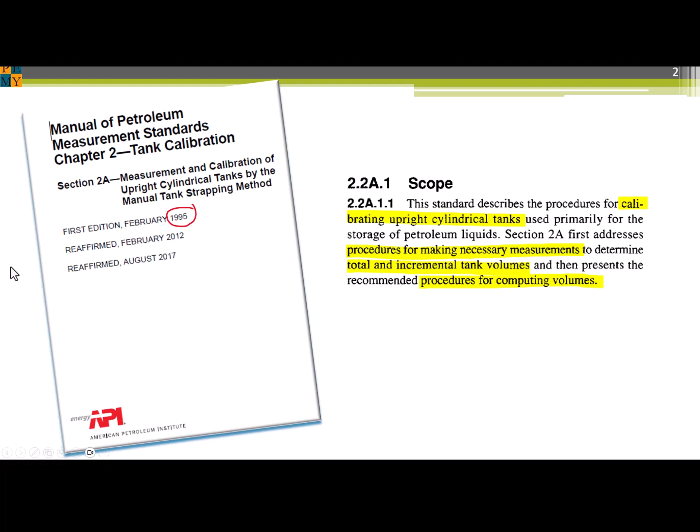The topic of today is about manual calibration of vertical cylindrical tanks. Note that this standard is nearly 30 years old without any changes. That's of concern, as you'll see. One of the important tools used in constructing the Egyptian pyramids thousands of years ago was the royal cubit, an ancient tape measure used by ancient engineers in the days of yore. The Egyptian pyramids are accurate to within 4 minutes of arc, or 1/15 of 1 degree when aligned along the cardinal points, north, south, east, and west. So I ask you, did standards help?

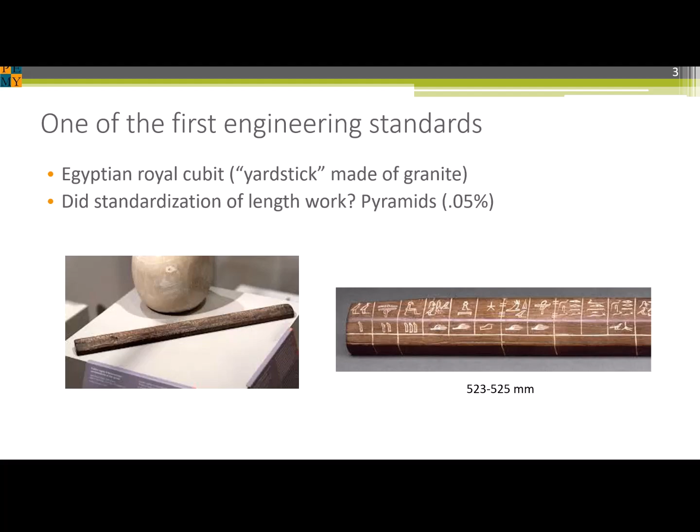The problem is that Big K lost 50 micrograms since it was created, and therefore the mass of a kilogram has changed and scientific chaos ensues. But all this changed as of May 20th, 2019. The new system is based on Planck's constant. The Kibble balance measures the downward pull of gravitational force on a mass by counteracting it with an upward electromagnetic force. The same kind of standards evolution has occurred with the meter.

Originally, it was the length of a bar at the Bureau of Weights and Measures. Now it is defined in terms of the speed of light in a vacuum. Incidentally, 4 of the 7 SI base units were redefined in 2019: the kilogram, ampere, Kelvin, and mole. The Kelvin is defined by the Boltzmann constant instead of the triple point of water, and the mole is now defined by Avogadro's constant.

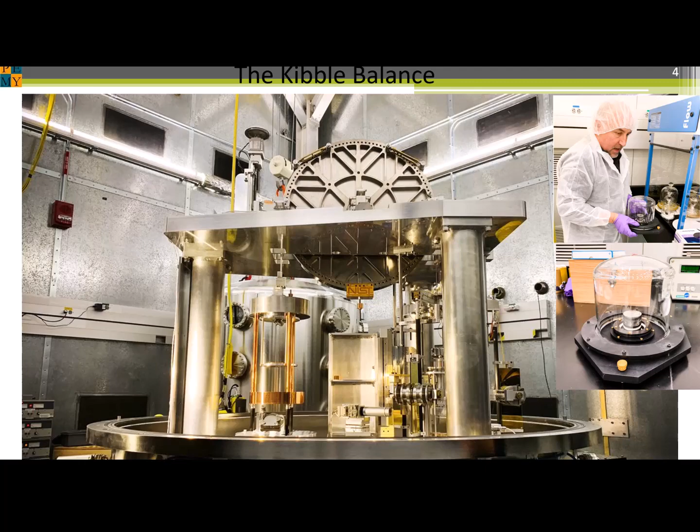This is a good example of why API standards have to be reviewed every 5 years. A de facto standard is a standard that is widely accepted and used but lacks formal approval by a recognized standards developing organization. De facto standards can result from marketplace dominance or practice.

You are all familiar with the QWERTY keyboard. This is an example of a de facto standard. Even though the keyboard is not the most efficient arrangement of keys that there is, it has been used so widely that it is now the de facto standard for keyboard layouts. And Windows, of course, sets a de facto standard for graphical user interfaces, or GUIs.

There aren't any tank calibrators that I know of that follow it 100%. They use bits and pieces of it as needed and discard or substitute other parts of it. So the standard is not really being followed and fails to function as a standard should.

I am postulating that without revision, Chapter 2.2a, that is manual tank calibration, is becoming a de facto standard, and 2.2a is fading in its role as a standard.

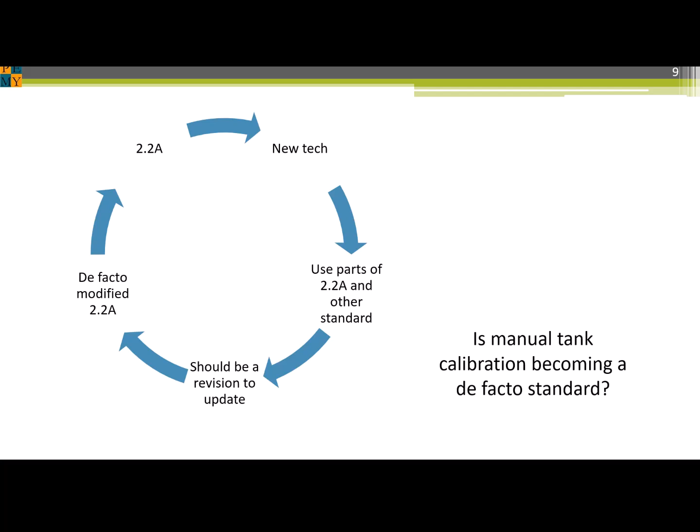Naturally, when you buy fuel, you want to know whether you got the right amount according to a standard. Owners often want calibrated tanks, even if the purpose is not for custody transfer, because they can do inventory reconciliation or audit for stock loss or fuel theft.

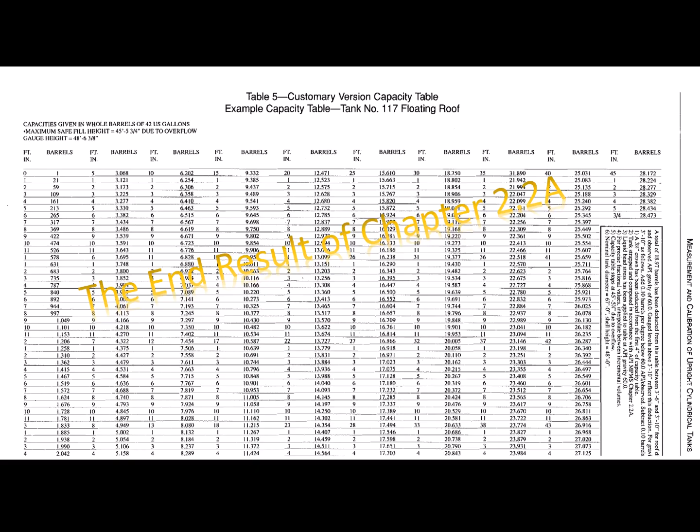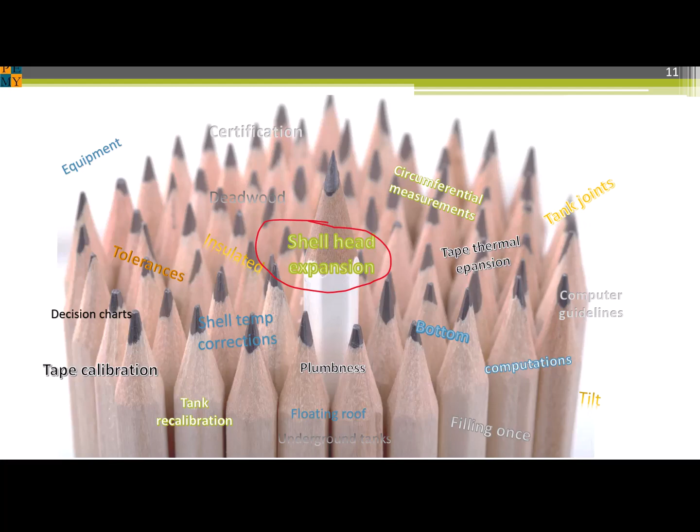What's the big picture of Chapter 2.2a? You can see that it covers all kinds of topics such as equipment, how to do the measurements, sources of noise like thermal expansion of the steel in tapes in the tank itself, what to do when insulation is involved, and so on. But our focus today is just on one small part of 2.2a, the shell expansion caused by pressure head.

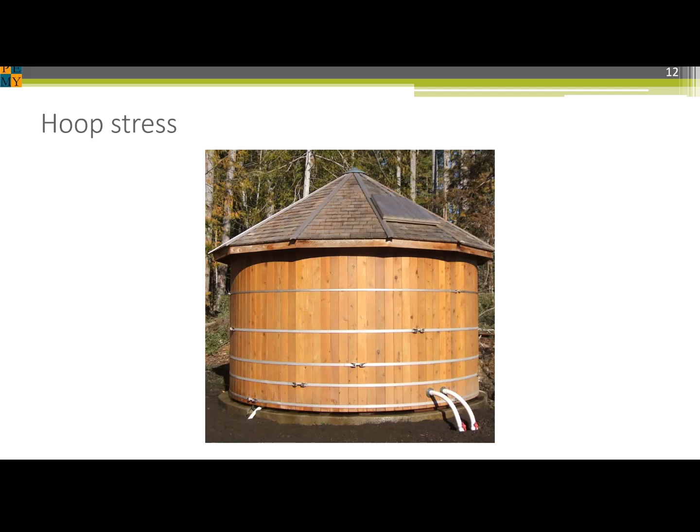Before getting into the ring slice method, let's talk about the expansion of the shell caused by pressure head. The wood boards are held together with bands or hoops. The hoop force provides the tension necessary to contain the liquid head. Even steel, like a rubber band, is elastic.

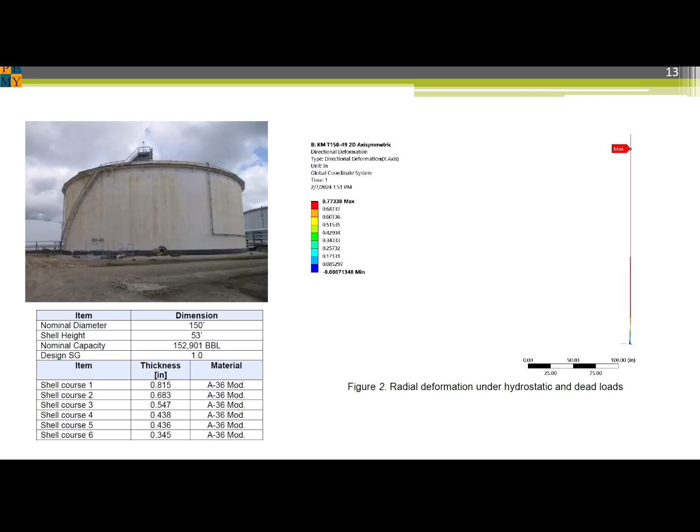This is a recent 150-foot diameter tank we analyzed with finite element analysis for a hydrostatic exemption. This type of analysis is a trade-off substituting advanced numerical analysis in place of a full water proof test or hydrostatic test. This tank has a maximum expansion of the radius of 3/4 of an inch, about 40 inches off the bottom.

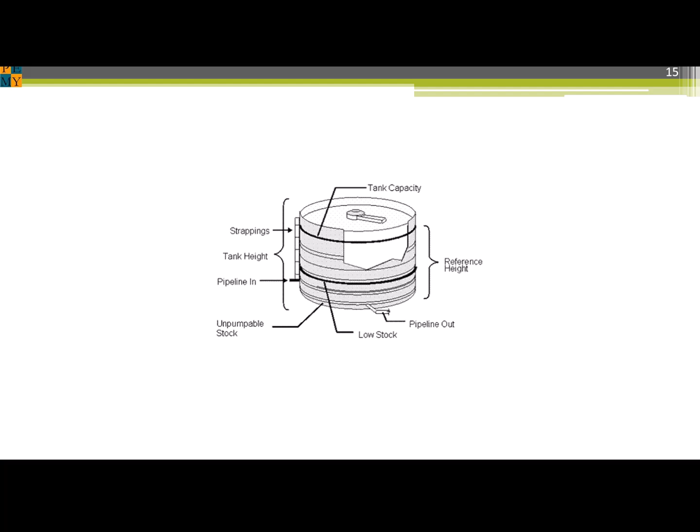This is a section of Chapter 2.2a that a ring slice method would improve. This is an image from Chapter 2.2a showing how tape measures are used to strap the circumference.

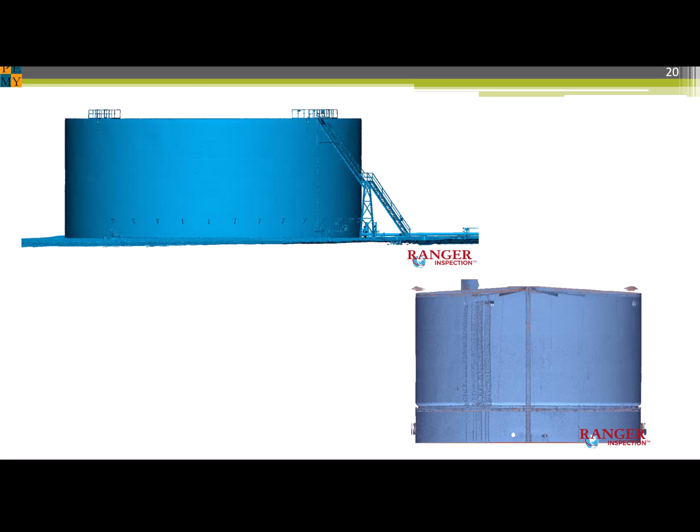Finally, on to the ring slice method. This is a method that Dan Comstock encouraged me to pursue after I bounced the idea off of him.

The basic idea is to take horizontal slices at 1 foot increments from the bottom to the top of the shell. The rings that result have no restraints on the top and bottom edges. In other words, the ring is pressurized and free to expand. The top and bottom of the tank are restrained to no radial movement, which is a good approximation of reality.

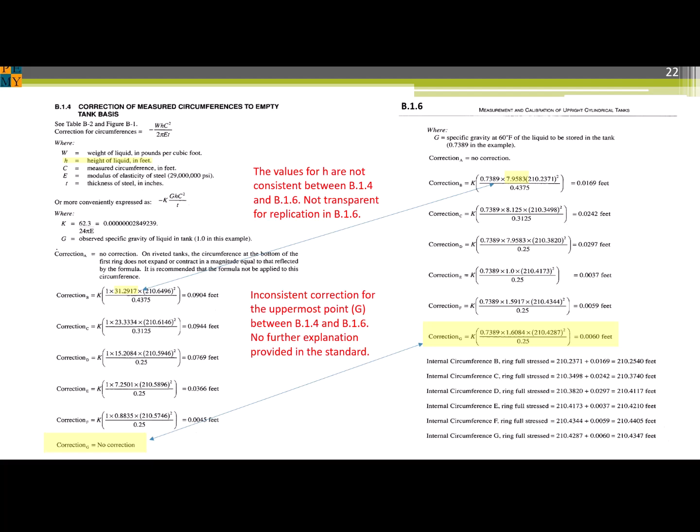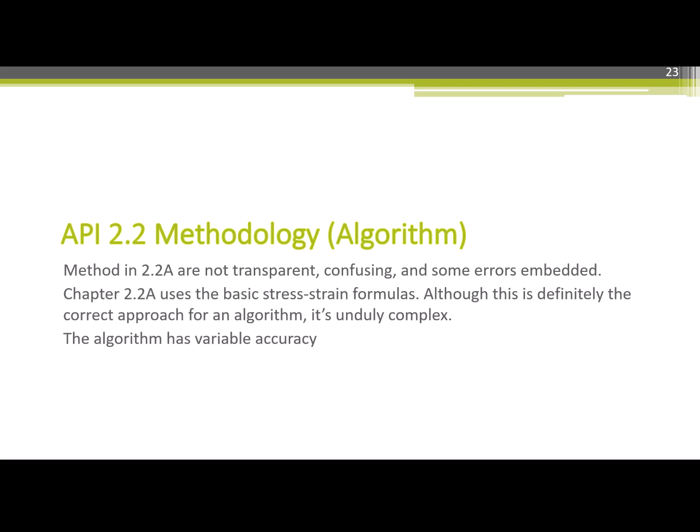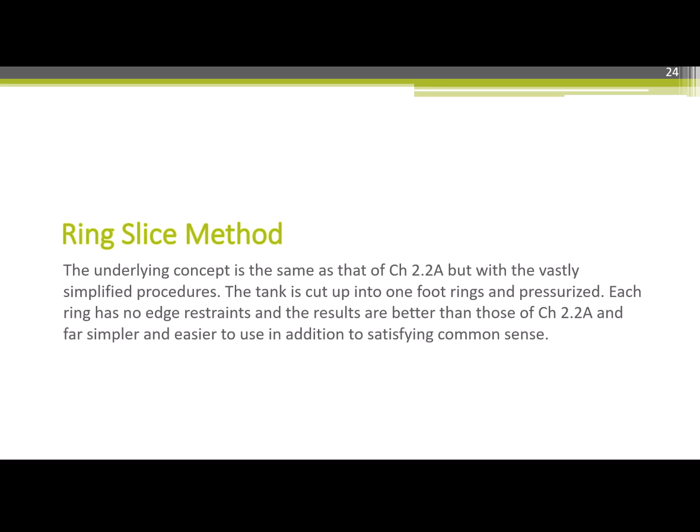The idea of an algorithm is that it's a cookbook procedure where no one has to know or understand how it was developed or how it works, but it does work. The shell expansion part of 2.2a is definitely an algorithm. The ring slice method is also an algorithm, but it's very simple and clear, much more so than the 2.2a algorithm. It's also easy to see how it works.

In data analysis, the gold standard is the benchmark, which is thought to be the very best way of checking models for accuracy. In our case, the gold standard is finite element analysis.

With the ring slice method, we looked at a lot of cases covering tanks with these variables to make sure it worked across the spectrum of common parameters. Some of the variables are diameters, specific gravity, and mild steel represented by A36.

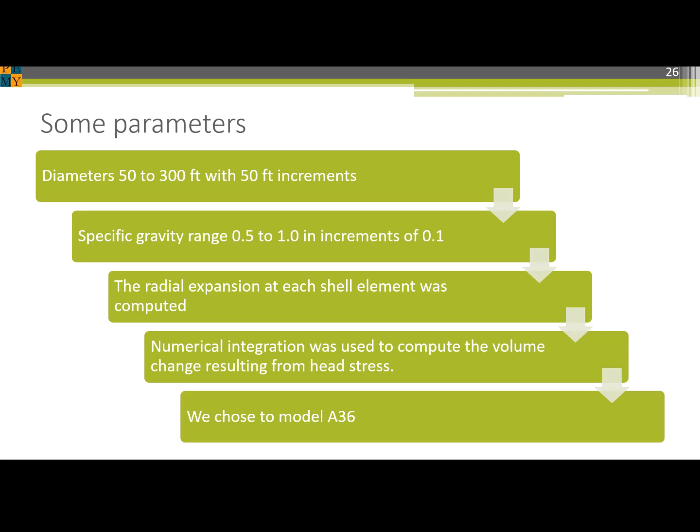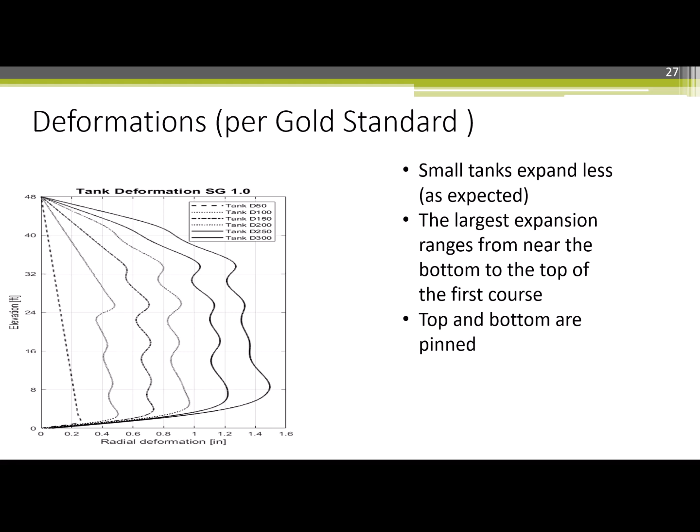We had to compare 2.2a as well as the ring slice method to the, quote, truth, which would be the gold standard. Indeed, FEA is the gold standard for problems like this. Here we compare the ring slice method to the gold standard.

Note that 1 foot above each course, we bring the expansion back to where it would be at the course below. This idea came from the so-called 1 foot method of API 650 and 653.

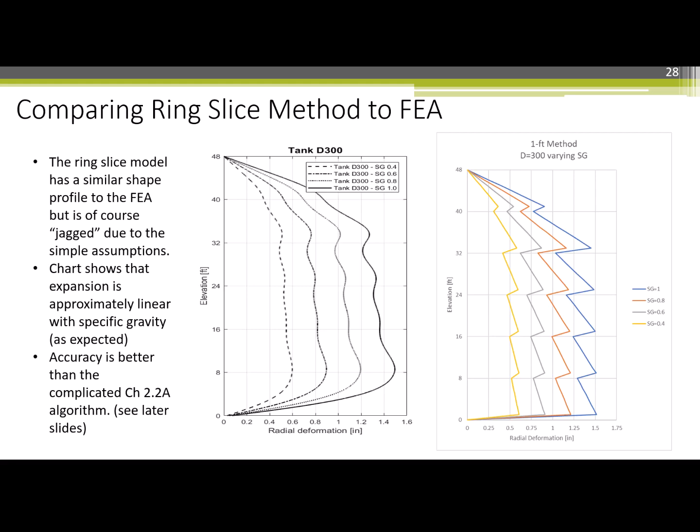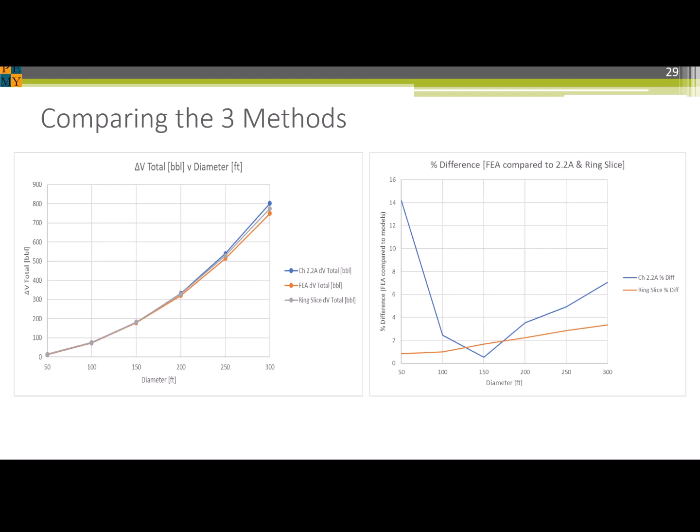There are other findings such as how the expansion is occurring in the tank. 2.2a increases capacity as you move up the tank, and the opposite occurs in ring slice. FEA shows that the ring slice method more accurately reflects where the expansion is occurring.

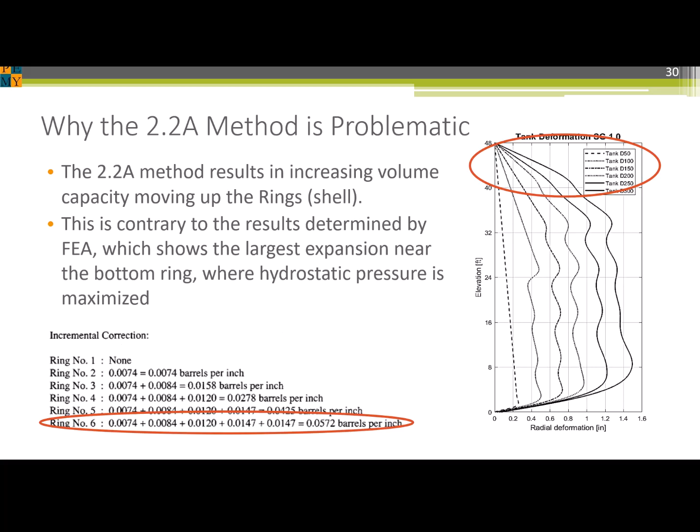There are some other reasons why ring slice method should replace the 2.2a method. First, expansion due to specific gravity changes is precise and well defined in ring slice, which is not the case for 2.2a. Second, ring slice is consistent with what the FEA results are in terms of how much expansion is occurring in each course as the tank is filled.

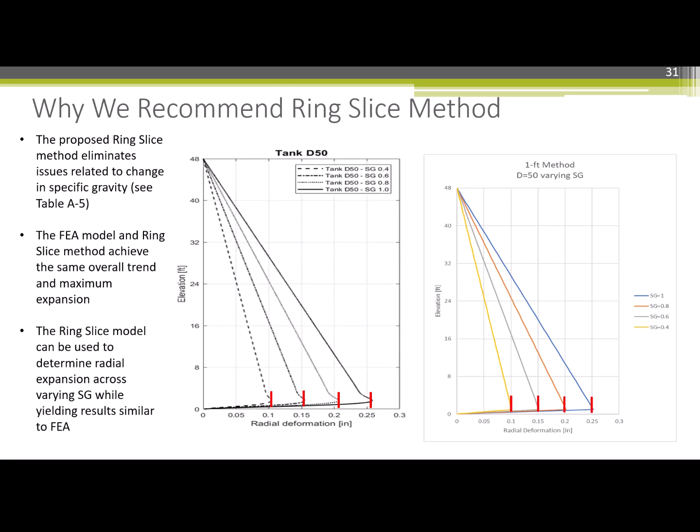It turns out that it's very close to linear, which makes sense because hoop stress is linear with pressure, which is linear with specific gravity. This was not addressed in 2.2a except very crudely. The ring slice method explicitly gives volume expansion at any specific gravity.

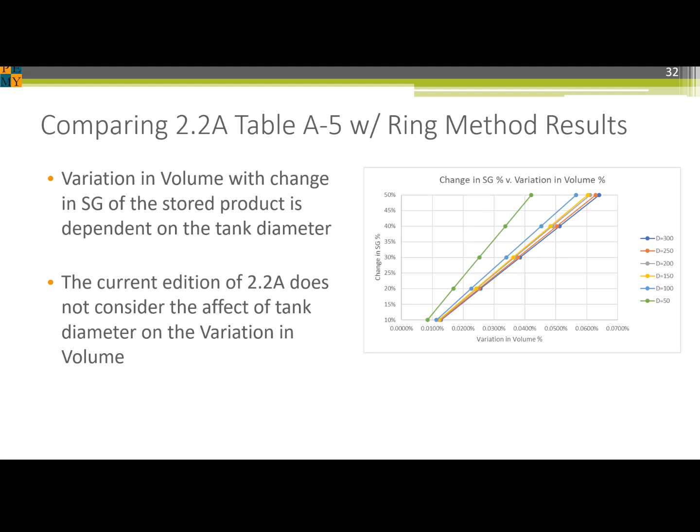Here are some conclusions. Implementing it should make this part of 2.2a much more user-friendly, accurate, and understandable. This method is easy to implement in Excel spreadsheets and easy to understand. We have given the task group a demonstration spreadsheet that implements the method way back before COVID-19.

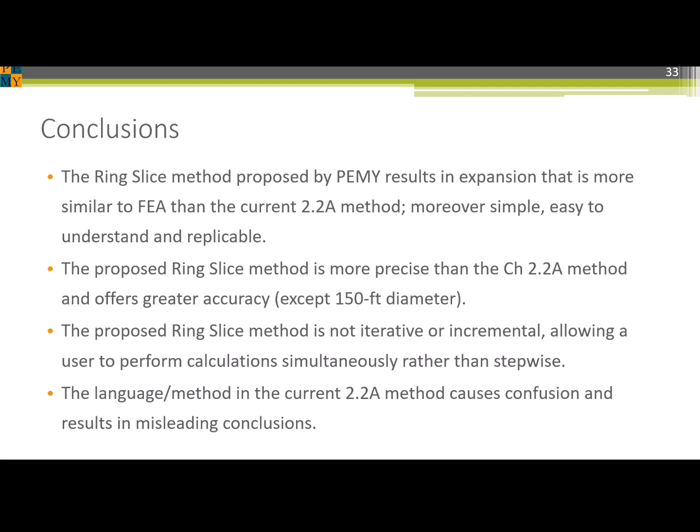Fortunately, we are going to talk about the ring slice method again this week. Thank you. I hope this was an interesting and informative example of how standards evolve with time. All of the standards are doing this all the time because of your efforts and expertise.